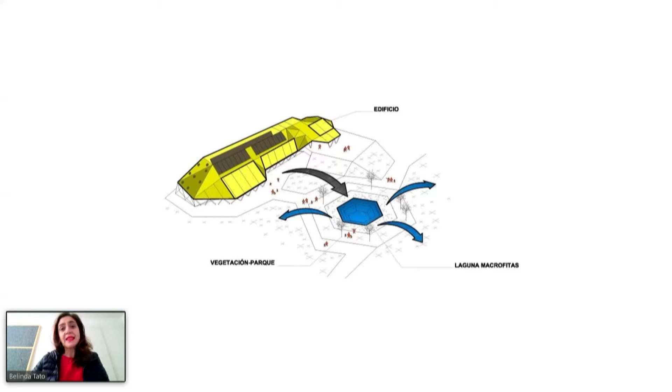So I'm going to present very quickly some of these examples. The first is about environment - this is a school we created for a city outside of Madrid, Rivas. It was a competition asking for a building for children between 0 and 3 years old. But for us, it was not only important to deliver a high-performing, energy-efficient building, but also to create a landscape in front of it in which we could recycle the water.

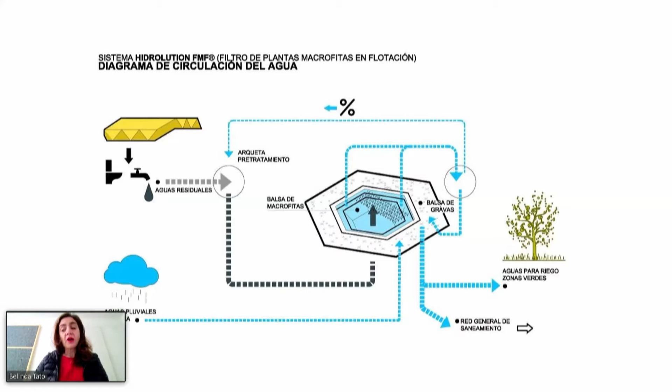Water is going to be an issue in the south of Europe. It is already an issue, and it will be even more so in the coming years. So the question was, how can we provide a sustainable solution to recycle this water, so we could design green areas around this public school.

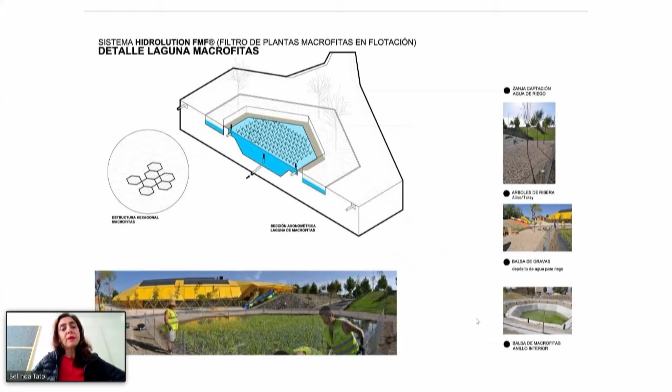So we partnered up with a company that works with macrophytes, which are very efficient at removing pollutants from water. The idea was not only to clean and recycle the water, but also to make it a feature that is public and visible for everyone, because we're making a statement every time we do a design.

Here we can see a close-up of the macrophyte, and here the lagoon we created together with the topography, because the idea was to create a kind of shelter space and public space for the kids to be around. Here is an image where the macrophytes are already grown. Again, I'd like to emphasize the social aspect, because even for this, which is a technical solution, you really need to partner up.

You really need to partner up with the officials in the city, with the people in management, and with the community as a whole, because they are part of the solution. It makes no sense to deliver any kind of solution if it cannot be maintained over time. So again, the social component and the engagement has been present in all these projects.

This is another project, probably most people may be familiar with it, but it's also about creating climatic comfort in a space that was created mainly for the cars, for car speed, and for the car air-conditioned environment. How can we bring something into the public space so that we create a more comfortable, more remarkable public space that can be used in different ways?

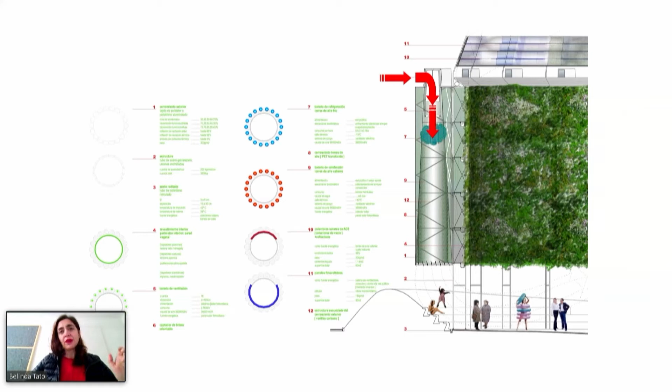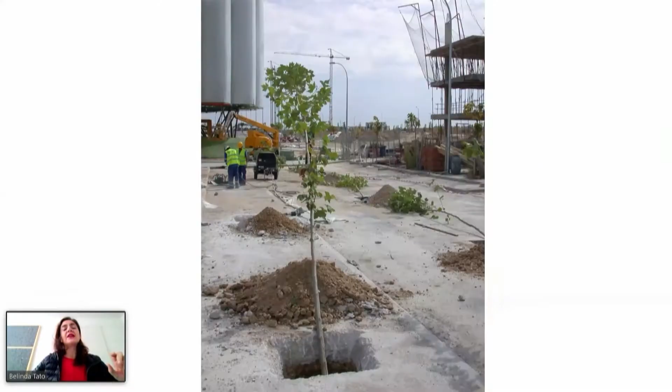But again, it was not only about creating this infrastructure, which is very noticeable, but also about planting trees, more trees, making this street more pedestrian friendly and bringing nature into it. As a matter of fact, this structure has become kind of an ecosystem pole because there are a lot of birds nesting on it. So again, how can we soften up the configuration and layout of the street to make it more pedestrian friendly, more green, more permeable, and also more useful for people to gather around for different types of events. So again, every project we have, we love design, we love to create this conversation, but we also love to see how people have used it.

This is a different setting. This is West Palm Beach in South Florida in the US, and it was a competition for the redefinition of this waterfront. As you can see, it's a very tough edge between the city and the water. And not only that, but also because of sea level rise, there's going to be a number of issues happening.

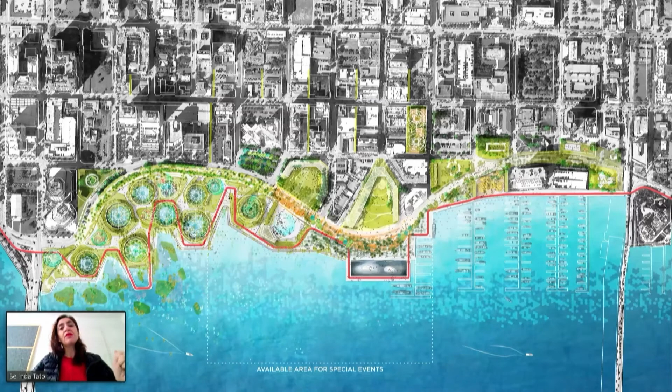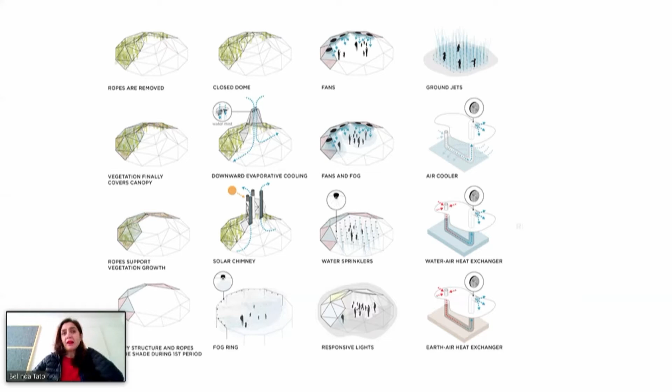So the idea was how can we make this waterfront more accessible, also in terms of equity? How can we make it possible for people who live in other neighborhoods and don't have that many possibilities to come to the city center? How can we create the programs and the climatic comfort for making it more usable? So we were also creating these kind of climatic canopies, and the idea was to embed into the public space programs that are usually kind of isolated. For instance, a swimming pool. How can the public space or the plaza become a swimming pool?

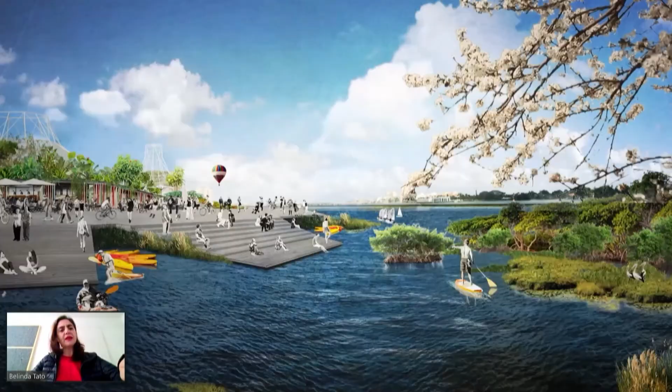And how can we create this kind of buffer space, also by the introduction of mangroves and all of that. So again, how can we make this edge a little bit softer? So of course, we had a number of different edges for the different portions of the waterfront.

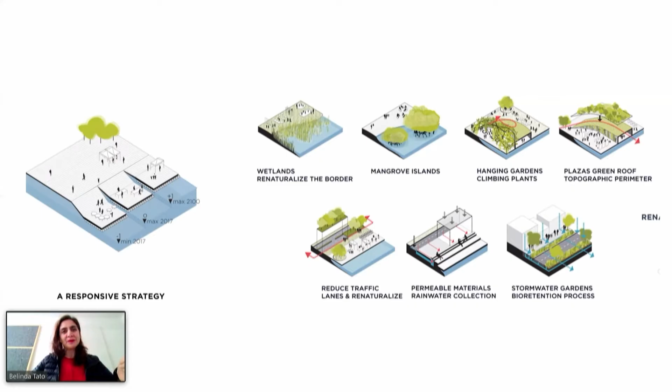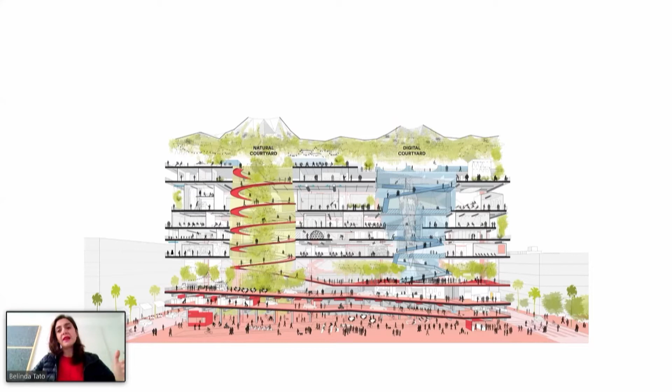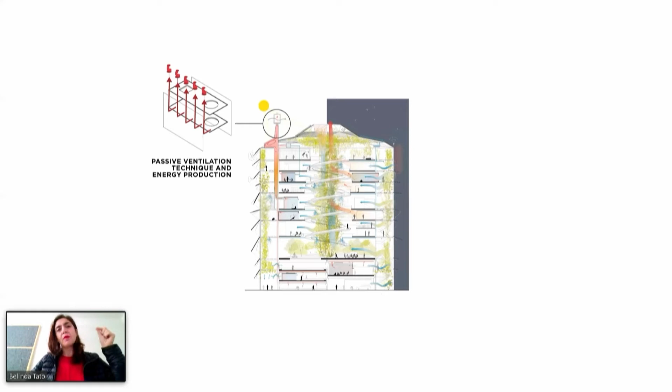So the idea was to work with nature, as it was mentioned. How can we make the most of the resources? So we were understanding that the building was not fully climatized. There would be spaces fully climatized, half climatized, and completely open, and it could be completely fine.

And this is a small project that we just finalized. It was an intervention, a temporary installation in front of a public school in the city of Columbus, Indiana. So the idea was, again, how can we do something? This was conceived in the middle of the pandemic, so it's been implemented last summer, but we started the process last fall, and we were very uncertain of whether the school would be open.

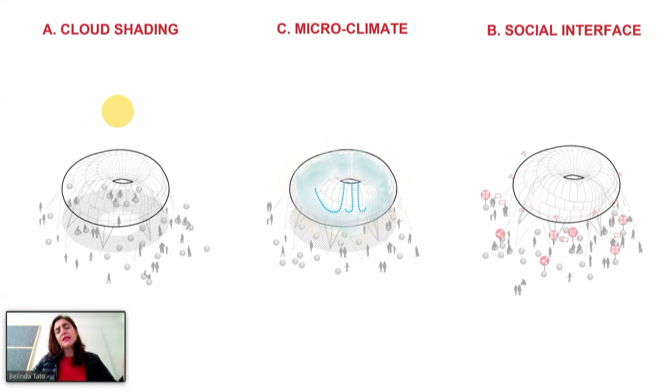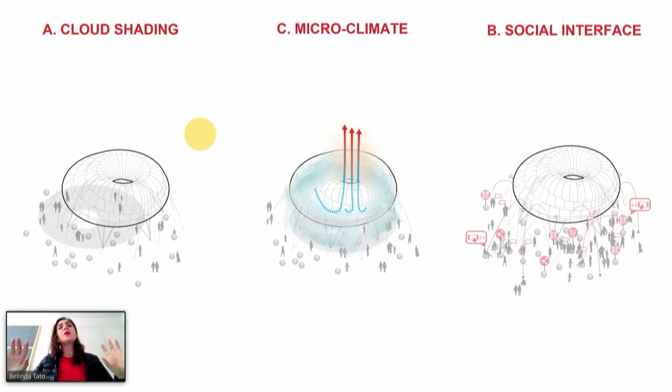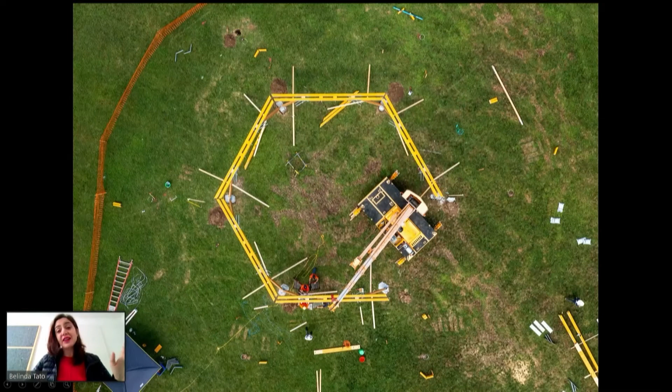We were running a number of surveys with the kids and the teachers, and what they missed most from the school, mainly the kids, was the social component, the hanging out with the friends. So our idea was, regardless of the pandemic, whatever the situation is in 2021, we will create this kind of cloud room. It's a classroom transformed into a cloud room that brings climatic comfort, so that kids can use it in different ways, and they can gather here for holding classes or for just hanging out.

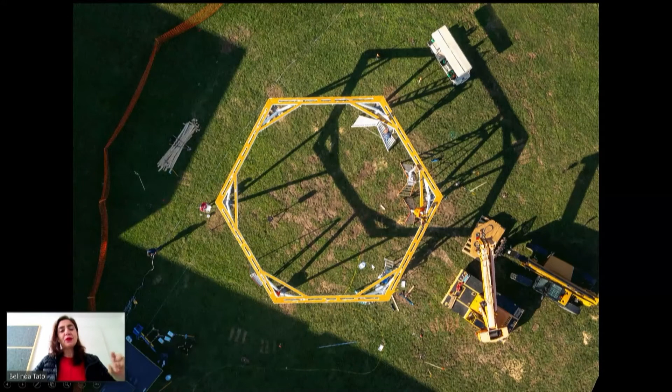So these are some elements. It's a wooden structure, it's an inflatable, and it's been a very exciting process all the way through. It's been exciting to also cooperate with a lighting designer, because the idea was to also enhance this idea of the education component. How can we bring some other elements?

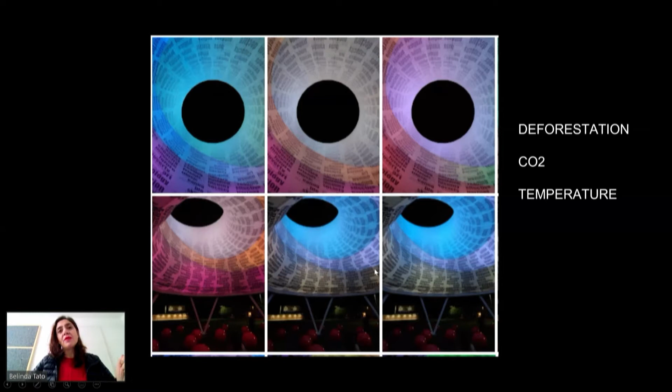So in the interior of the inflatable, we have this cloud of words, which come from the surveys that we ran with the kids and the things that they miss the most from coming to school. Again, the social component, how people have conquered, embraced, used the space in different ways, and they posted on Instagram, they did these drone videos. Because again, what we're doing is creating a space for people to gather, for people to enjoy, for people to live, right? I think the most moving part is always this component, how people are using the spaces that we created.

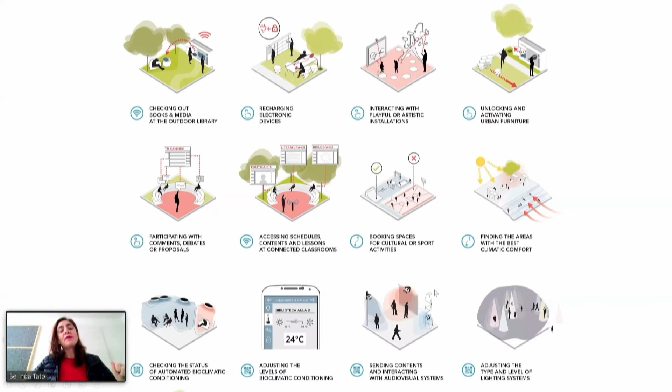So for technology, we've been exploring ways of creating the interfaces and how can people utilize space in different ways, now that we have these technologies kind of out our hand.

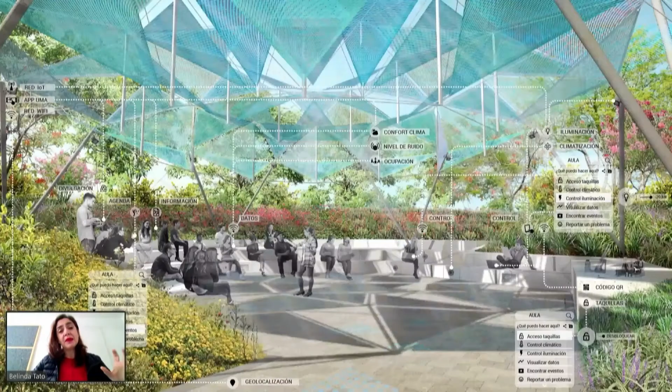This is a project that we're currently building in the city of Malaga. It is a boulevard just in front of the University of Malaga. The idea was, this was also pre-pandemic, how can we bring some of the academic activity that usually takes place indoors to the outside space so that it can become an interface between the academic community and the people living in Malaga. How can we also get advantage of the climatic comfort that takes place most of the year to create this kind of possibility? So these are the configurations of some open air classrooms.

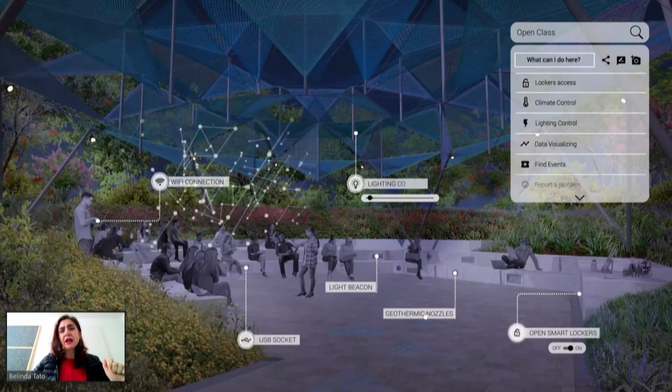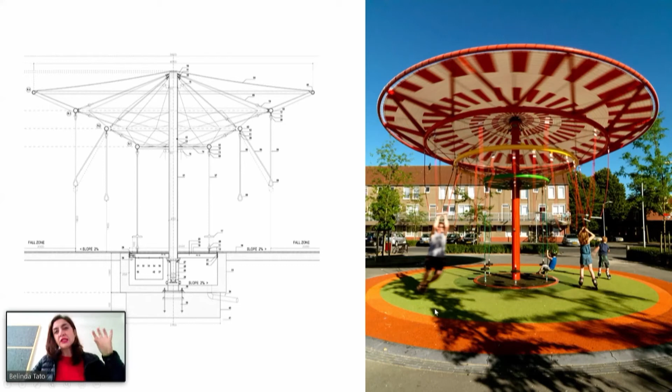But also, again, the educational component linked to the technology. This is a small project that we built in the Netherlands, and it's a carousel that, with the movement and rotation of the kids, is producing energy for the lighting at night. So again, how can we embed sustainability as an educational component to become an everyday life experience?

And the last section is the social. So we've been doing participatory processes in many different places, in different ways, different scales. We like to plan design as these two parallel lines. There is always this kind of understanding the space, but also understanding the social component and how the social component and the activities that we develop are informing design and returning to the social component. So it's somehow we're weaving this conversation between these two layers.

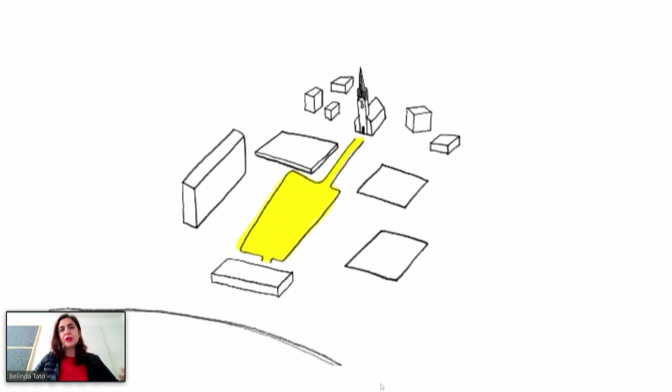So this is a project that we did in Norway, in which I'm not going to play the whole video, but again, this idea of gathering information from the society to make a project and a design that is collecting their dreams and expectations and transforming them into solutions. It was called Dreamhamar, and we ran a number of workshops and activities with the people locally, but also digitally through the website and all of that.

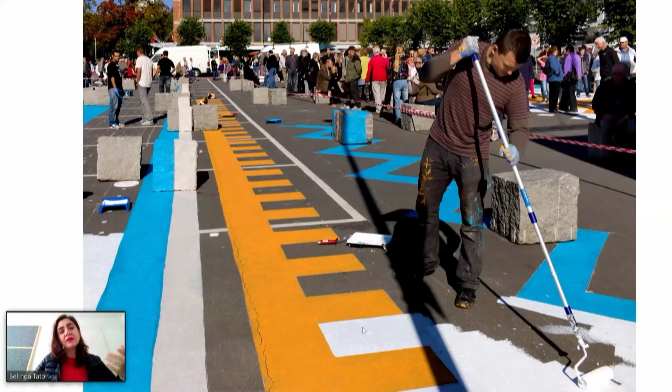And also we did this kind of thing that we like, these urban actions. How can you transform very quickly, by very low means, a space that has been mostly a parking space for the last 50 years? We invited the collective Boa Mistura, and they were painting and transforming the parking lot into an Norwegian sweater pattern. So the idea was to provide experiences.

This idea that participation is not only about talking and exchanging ideas, which is great, but another component is how can we design experiences and mock them up so we start talking about experiences that people are having, on the spot.

So we created the Dreamhamar, with a number of activities: the green Hamar, the light Hamar, the play Hamar, gatherings to show that the space could be much more than just a parking lot. Because if we don't connect with people who have to use the space, take care of it, and demand and claim it for the next few years, the design could be a challenge.

So we created an activity with more than 1,400 kids. They were engaged, producing at their schools their own models, their own ideas. Somehow the kids became ambassadors of the project in their community, in their families, and so forth. We've run a number of different activities to engage in these conversations.

I love words. I love working with words. This was in Tegucigalpa, Honduras, where we launched students with 2,200 post-it notes to the street to collect ideas. This was the final action after a number of other actions.

So this idea that we can have lengthy projects or lengthy processes of engagement, but we can also get into action with something quick and try to get inspiration very quickly. Different tools, different things, how can we transform things? How can we get kids to talk about their public space in different ways? How can they understand that the city is also a process of negotiation in different ways?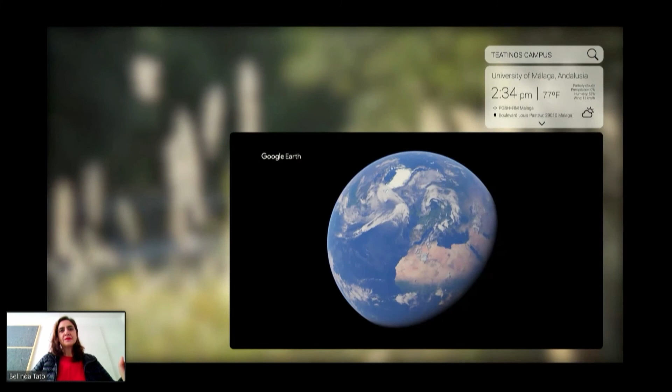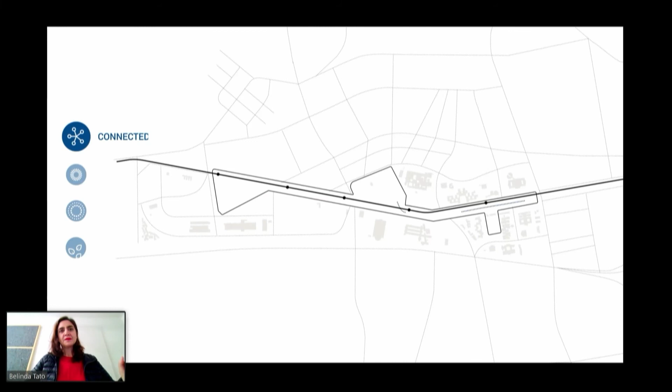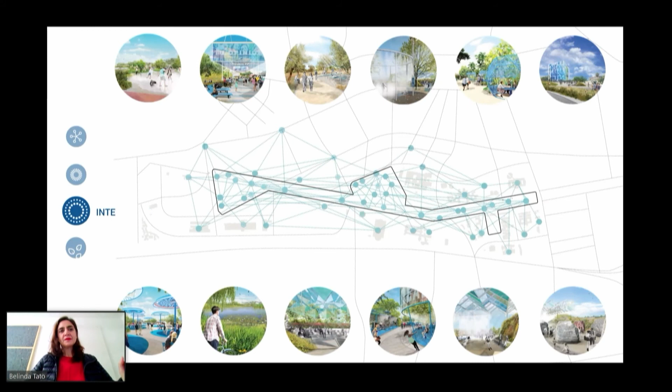The main boulevard at the Universidad de Málaga connects existing facilities and opens up the campus to the public, creating a pedestrian walkway activated by hubs or public squares with learning and leisure spaces, incorporating technology to create an interactive urban environment connected to the digital world, an ecological corridor that efficiently manages resources, creating diverse natural landscapes.

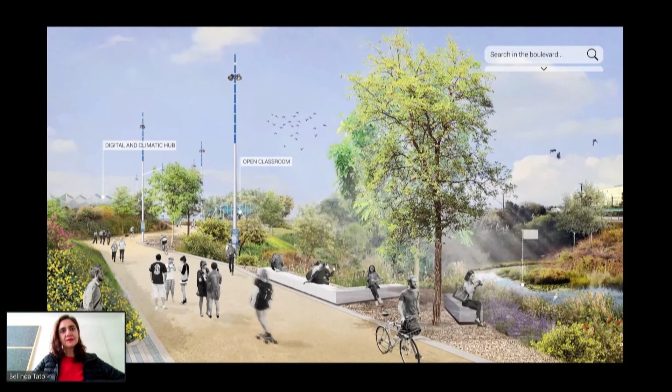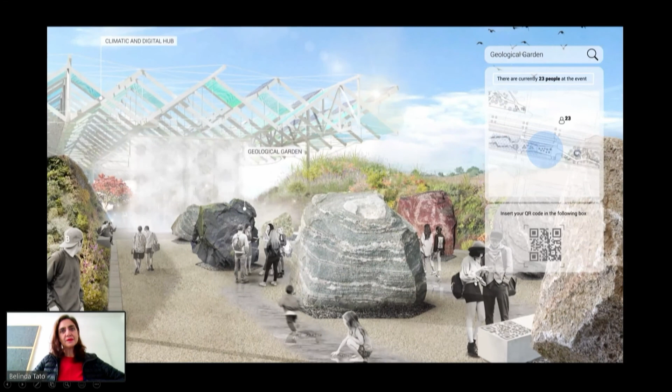Pedestrian walkways protected by natural buffers become the perfect setting for meeting up, resting, and relaxing. Through a digital application, users can interact with the surrounding environment and access augmented reality with academic and cultural content.

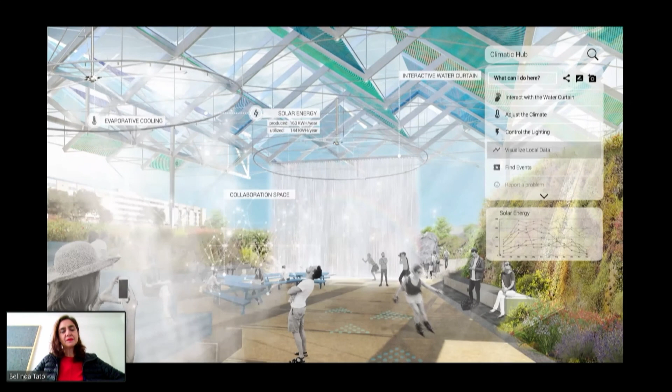The Climatic and Digital Hub integrates collaborative learning spaces, allows interactive modification of environmental conditions, and generates all of the park's energy. The Hub's canopy hosts technological systems that connect users to the physical space and the digital environment.

Along the boulevard, open classrooms are equipped to extend the university experience to public spaces. An extensive network of sensors generates open data that enables climatic research and allows real-time identification of the most comfortable zones of the boulevard.

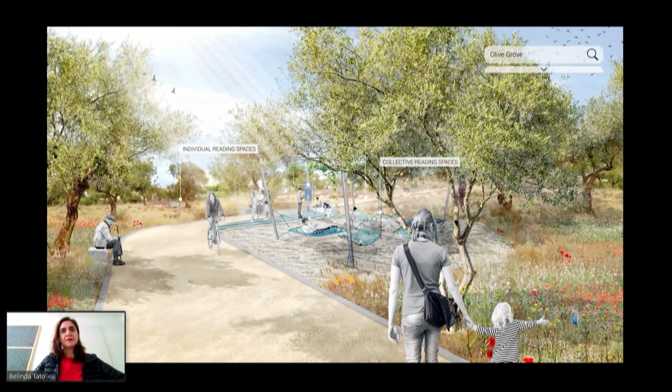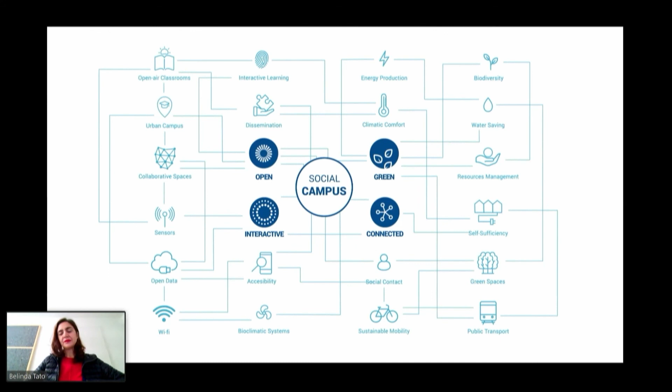The tranquil Olive Grove's open library encourages reading and resting while promoting and protecting biodiversity. A connected, open, interactive, and green campus. An intelligent natural space with positive energy balance and bioclimatic comfort. A positive space where collaboration, creativity, and learning define the urban scene.